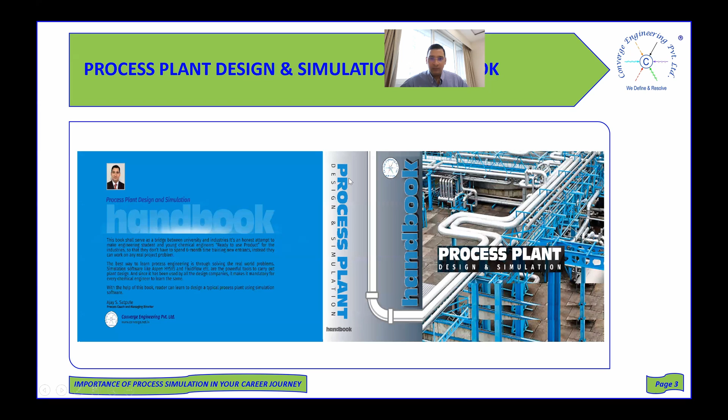So as someone mentioned, I've written two books. This is the first book, this is my lockdown product. With this book, one can learn Aspen HYSYS, not just steady state but the dynamic simulation also. And this is a very good resource for doing plant design.

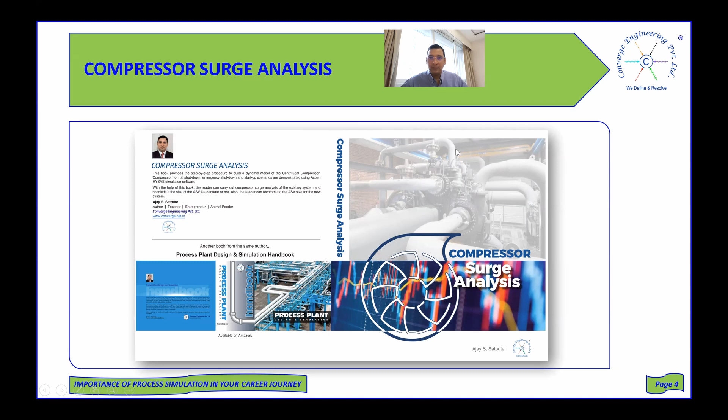This is the second book that was published last year in May. This was the anti-surge valve sizing for the centrifugal compressors surge analysis.

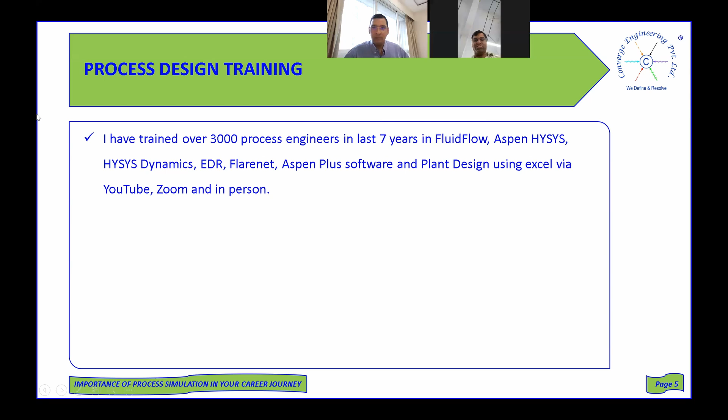All right, so I'm a trainer also. I have trained over 3,000 process engineers in the last 7 years with respect to simulation software, like Aspen HYSYS, FluidFlow, FlareNet, etc. So three of my students are PhD, and I have trained from freshers till retired chemical engineers.

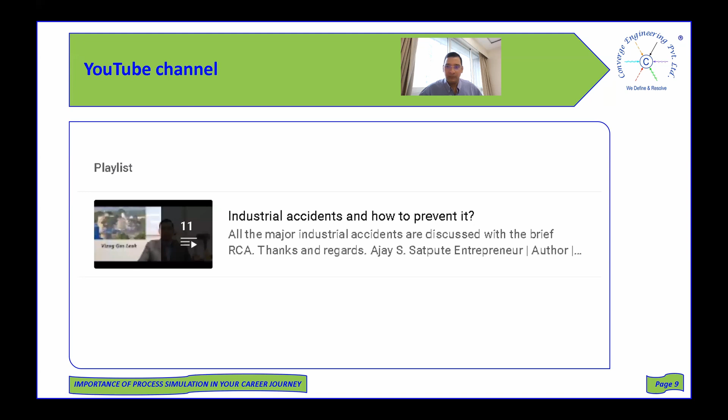And recently we had completed one series on industrial accidents and how to prevent it. So all the major accidents that we have covered, right from the Bhopal tragedy till recently what we have seen in Dombivli.

So long story short, I am a perfect example of this. I'm going to tell you what you need to do in your life as a process simulation engineer. So the career opportunities for a chemical engineer in process simulation.

So where can a chemical engineer be placed as a process engineer with simulation software expertise? You can work in an engineering consultancy like Worley, Technip, or Converge. You can be an R&D engineer working for BARC or ISRO or any other research institute. You can work as a process engineer in operating companies, in the technical services department, or you can be a production engineer in an operating company, or you could be a faculty in an engineering college.

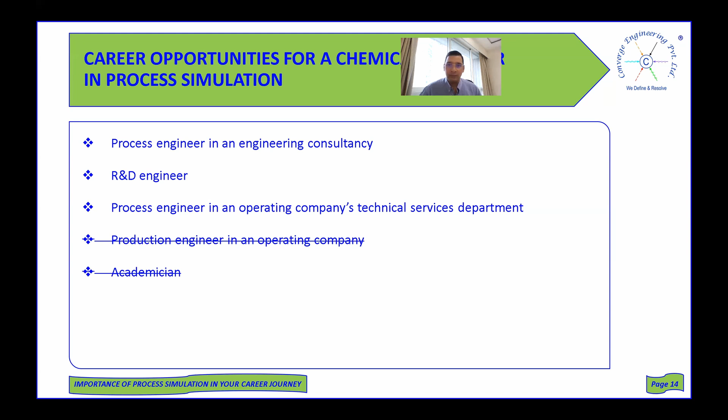But if you want to get into the simulation part, then probably production engineer and faculty are not for you. You would rather be a process engineer in a consultancy or an R&D engineer, or you will solve technical problems in your plant in the technical services department.

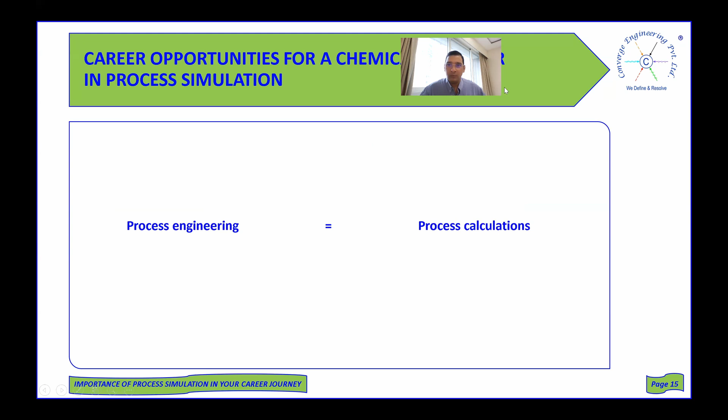The skill set required is basically process engineering, nothing but process calculations. You must be excellent with respect to calculations. And the skills required for a career in process simulation: your engineering concepts must be clear, right? So no subject should be kept as an optional subject.

You have to study 100%. You need to hone your analytical skills, because the process engineer solves problems, so you should have that problem-solving attitude. And you must have attention to detail. If any scope of work document is given to you, you have to make sure you read it thoroughly, without missing any sentence or paragraph.

You must be an excellent engineer who can work in MS Excel, and your VBA, Visual Basic skills should also be honed. If you want to become an excellent process engineer, you cannot bypass Excel, you have to become an expert in that. And of course, simulation software proficiency must be there, all the relevant software like HYSYS, EDR, FluidFlow, or PipeNet. So you must know how to use all the software.

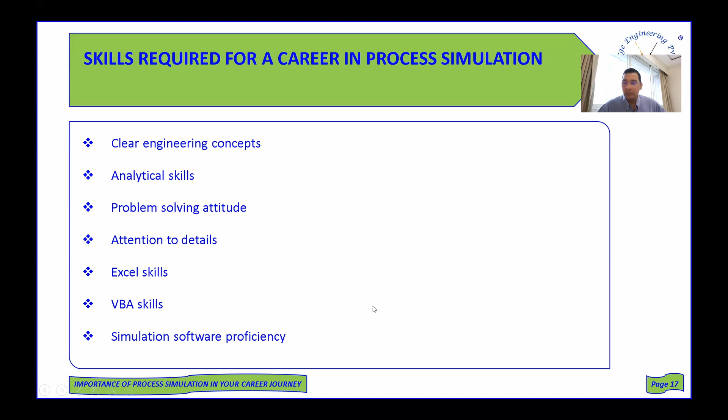So the question is, do you need to be a class topper to excel in process? The short answer is absolutely not. As a process engineer, you must be a hardworking person. Class toppers basically excel in the research field, or they could be very good teachers working as faculty in an engineering college. But if you want to be a process engineer in a consultancy or solve plant problems, you don't have to be a class topper, you don't have to be a smart person. If you are a hardworking guy, that will help a lot. Make sense?

Okay, so let us continue with the importance of process simulation. Can we do plant design without using simulation software? That's the question, because a couple of decades ago there were not many process simulation software, computers were not even fast. Yet the people who were designing plants then, we can see several plants running very well till date. So then why do you need to use simulation software today?

Valid question, right? The answer is that plants you must be seeing which were designed without the aid of simulation software were all over-designed, multiple times over-designed. So the cost of those plants would be much, much higher as compared to what you would get after using simulation software. So it is not possible to do plant design without the use of simulation software like Aspen HYSYS or EDR, etc. You have to have simulation expertise to do plant design these days.

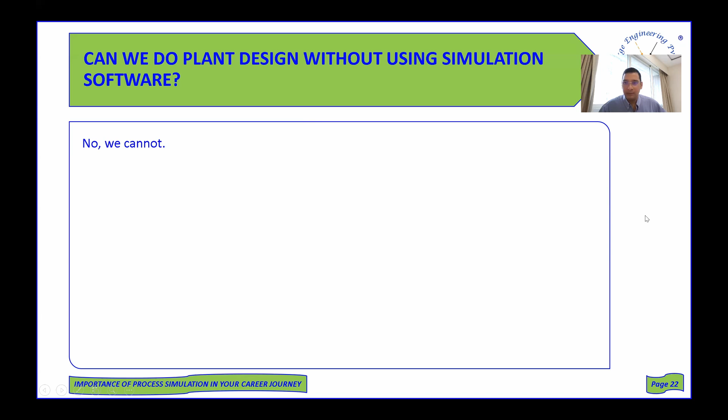We'll take one example. So the reactor needs benzene as one of the reactants. And what is the flow rate that we want? It is 30 meter cube per hour. And at what pressure do we want it? At 4 bar gauge pressure.

So where from are we going to get the benzene which will be sent to the reactor for further reaction? There is one vessel, the benzene storage vessel, operated at 1 bar gauge pressure. You can see the operating pressure is 1 bar gauge, and from 1 bar gauge pressure we want to push that benzene to 4 bar gauge pressure. So how is the pressure increase going to happen? Pressure is going to rise because of the pump.

So there is pump sizing required. Then for the pump we need to have the pump suction line, and there will be a pump discharge line. And we want 30 meter cube per hour, so flow rate has to be measured. How are we going to do that? There'll be a flow meter - we are using, say, a flow orifice. So we need to size this flow orifice.

We are going to maintain a certain level in this vessel, let's say 60% liquid level. So what is going to make sure that the level is not 0% or 100%? We have this level control valve. So this sizing will also be done by a process engineer.

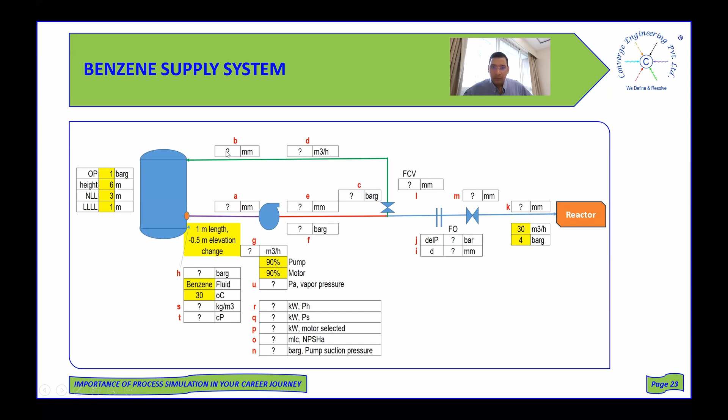So whatever numbers you see here, all the ABC, that is coming from following some process standards. And the good thing is, whatever we need - line sizing criteria, control valve sizing criteria, or even orifice sizing criteria - are all available in those process standards. And fortunately, there are only less than 10 process standards that a process engineer has to use.

Once you are thorough with this - let's say API 14E gives line sizing criteria - so what is the pump suction line sizing criteria, or pump discharge line sizing criteria? If it is a gas line, what should be the maximum velocity? That is again a different line sizing criteria. If it is two-phase, then comes the erosion velocity criteria. So all these things are available.

So the thing is, you need to read it and understand it. And that is the reason, as I said earlier, to become an excellent process engineer you don't have to be smart, you have to be hardworking, because you are doing the same thing again and again. So eventually, after a couple of projects, you become an expert in that. For the third project, you don't need anybody's help.

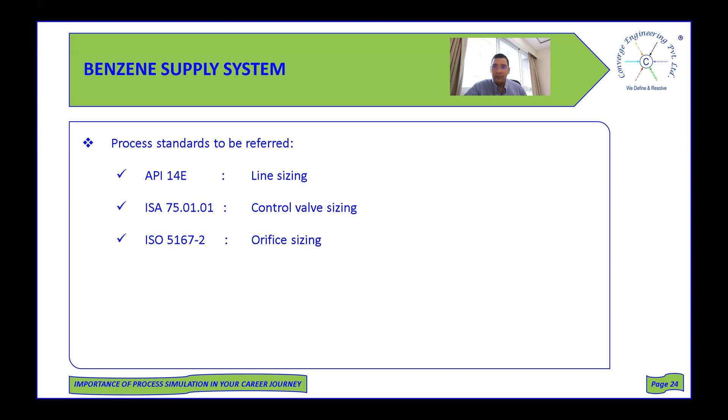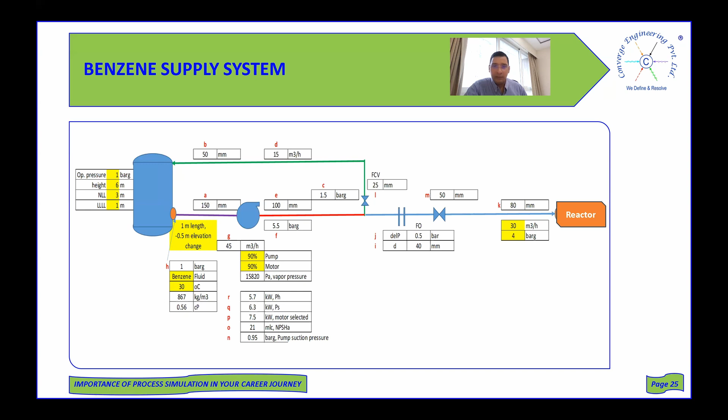This makes sense, right? So once we have used all these standards and done our calculations as per the guidelines given in those standards, using the Excel file also we can do this.

If you use simulation software like Aspen HYSYS, this is a screenshot of the Aspen HYSYS model. We can do the same thing but in less time and more accurately, because at every point we can get the physical properties of every material stream. So we would know exactly what's happening in that particular plant.

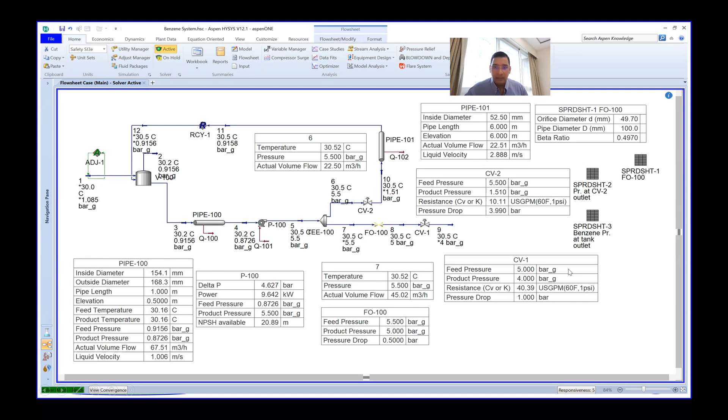In this case, simulation software like Aspen HYSYS is not required, as the design is quite simple. So let us make things more complicated.

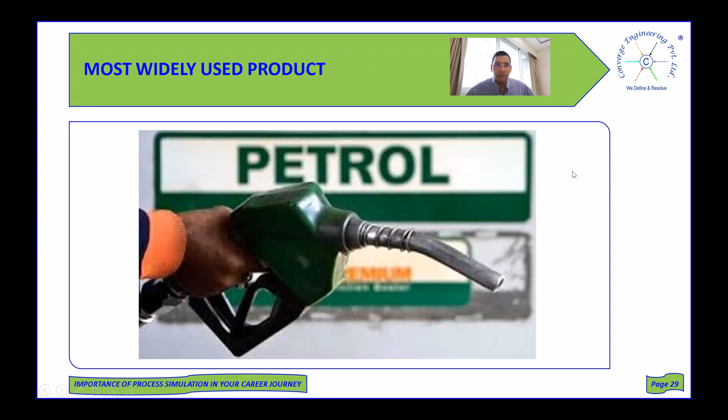You know this product is one of the most widely used products, petrol. Where do we get this from? Who manufactures it? Refineries. And what is the raw material for this refinery? It's crude oil, correct?

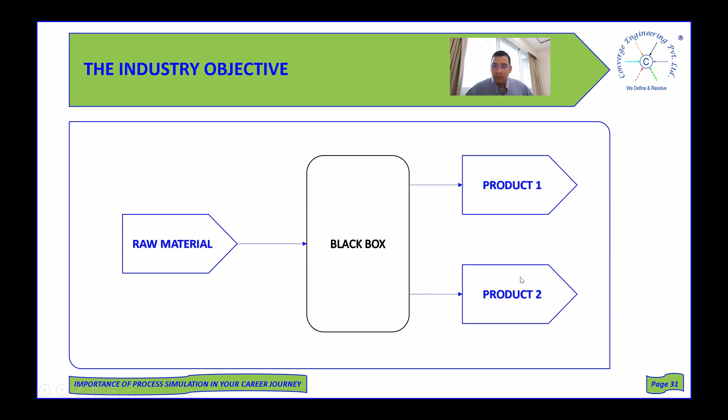So any industry's objective would be to take the raw material and convert that into useful products. In this particular case, crude oil is our raw material, and from crude oil there are different products that can be extracted - bitumen, diesel, petrol, kerosene, LPG.

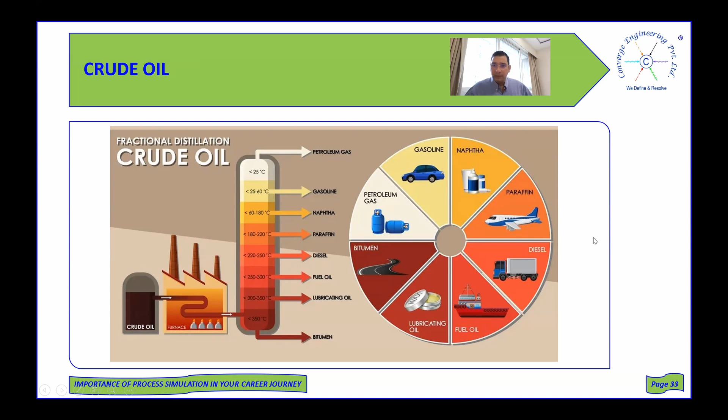So you must be wondering why exactly these refineries would do this hard work - take the crude oil and produce petrol and other products. Can anyone tell what the purpose is? Do they do it for the benefit of society, so people can run their cars and other vehicles? Absolutely not, that is not the reason.

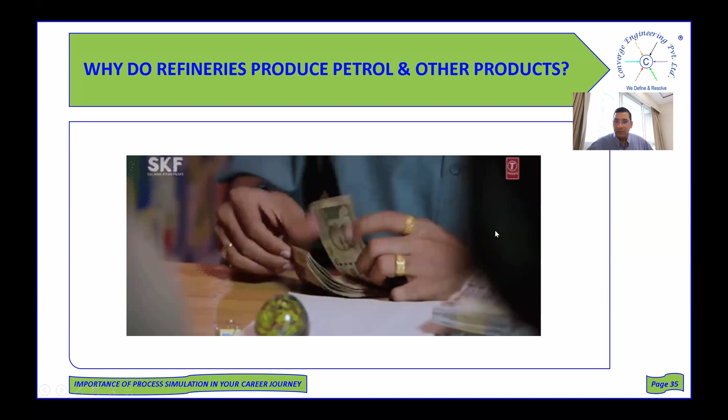The only reason why refineries or any other company would produce or manufacture something is all for the money. So a process engineer would have technical aspects intact as well as commercial aspects. He or she would know that if I design the plant in this way, whether the plant is going to make profit or going to be in loss. Make sense?

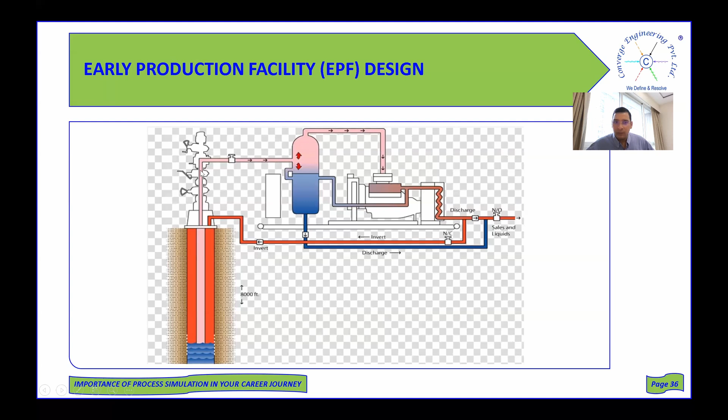Let us talk about this early production facility, or EPF, design. So how is the crude oil taken out from the Earth's core or Earth's crust? You're going to drill a hole, and then under the Earth's crust you will find deposits of crude oil or gas or even produced water, and that will be in pressurized condition.

That will come out to the Earth's surface through this pipe, and this will be sent to heat exchangers. It will be sent to the heater to increase the temperature of the two-phase feed - here we are considering oil and gas. So it goes to the separator. What is the function of the separator? To remove vapor, or remove gas from the oil. Then gas will be sent to the compressor for further processing, and that can be used as CNG or LPG.

The oil will be sent through the pump, it will go to the flow orifice, then you will go to the LCV, then finally go to the preheater, and it will be sent finally to the storage tank for storage, and that crude oil will be sent to the refineries for further processing.

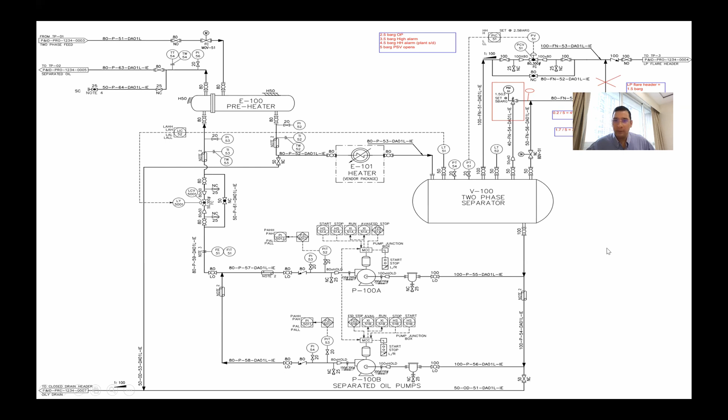So in this, what software might one use to do the design? Aspen HYSYS, and then Aspen EDR. EDR for heat exchanger sizing, and Aspen HYSYS for the process simulation.

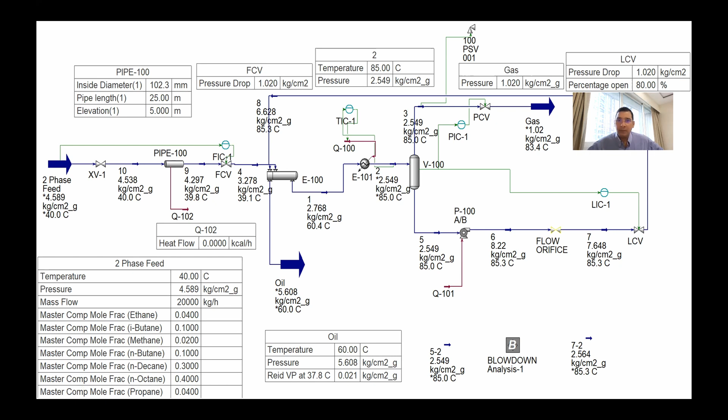This is the model that one can get for the same system using Aspen HYSYS. So we have this on-off valve, the pipe segment for two-phase line sizing, a flow control valve, a heat exchanger - shell and tube heat exchanger - then a heater package, then it goes to the separator, and at the bottom you can see the pump, followed by flow orifice, LCV, and in the vapor line you might see here a pressure control valve. So whatever we have on the P&ID, on the drawing, everything can be simulated using Aspen HYSYS.

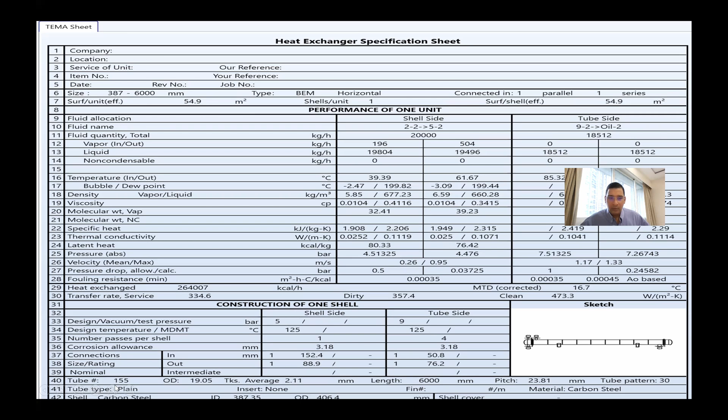And this is the sheet that will come from Aspen EDR. It would tell you how big the heat exchanger, or the preheater - the shell and tube heat exchanger - you need to design. In this case it is like 55 square meters heat transfer area, the tube length is say 6,000 mm, and you can see the number of tubes is 155. This is called the TEMA sheet.

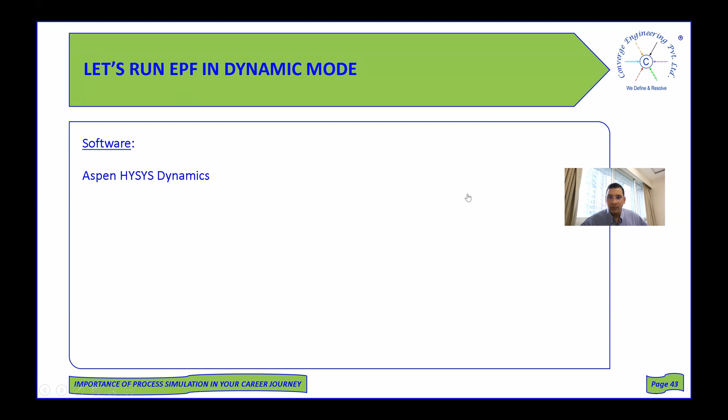Right, so I'll just click here to run it.

So you can imagine the power of the simulation software. You have not purchased a single nut bolt for that plant, but still you are able to visualize what is going to happen when the plant is in running condition. Whether the equipment that you have designed is adequate or not, and whether there's going to be a bottleneck.

If I increase the set point from 20,000 to 22,000, all these scenarios you can study before a single nut bolt has been purchased. So that's the reason it makes more sense for operating companies to invest in modeling using simulation software, so that they can save a lot of money.

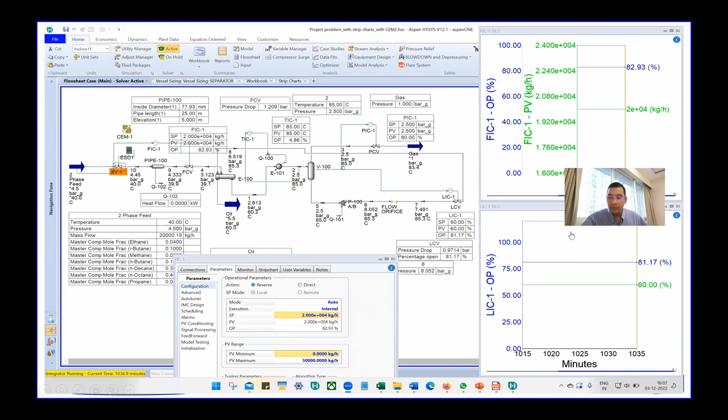In future, there is something called pinch analysis. The objective of pinch analysis is to minimize or eliminate the utility. Utility means steam, thermic fluid, cooling water, chilled brine, etc.

Now, one of the major reasons operating companies make losses is they spend a lot on utility. So if you are able to reduce steam consumption, cooling water consumption, or chilled water consumption, the total operating cost would be reduced, and since profit equals sales minus cost, your profit would be increased.

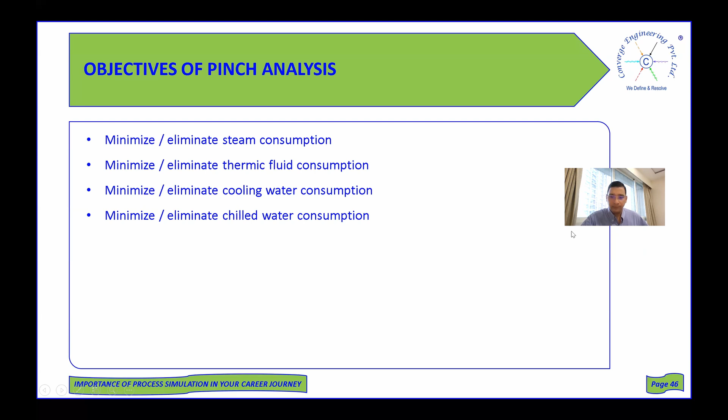So there is this example we have, this two-phase feed. It is going through the flow control valve, then directly to the heater package and then to the separator. Finally, we wanted oil at 60 degrees C temperature, and we have here a cooler. We'll be using cooling water here.

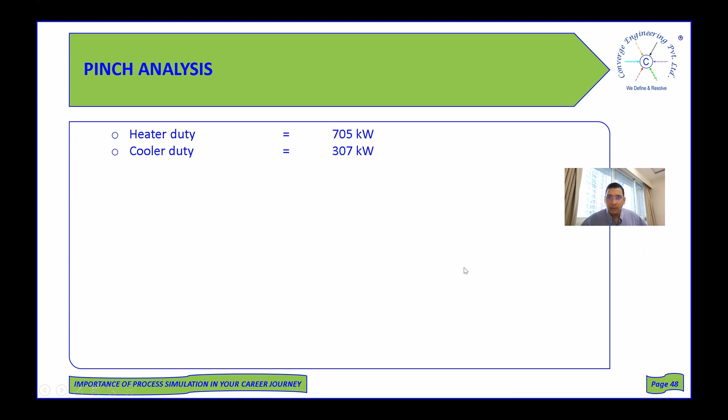Now, this is the existing system. The heater duty is 705 kilowatt and the cooler duty is 307. It means for heating purpose we need 1.2 TPH of LP steam and around 50 meter cube per hour of cooling water. This cooling water would come along with a cooling tower, cooling water supply pumps, piping, instrumentation, control valves. And this 1.2 TPH LP steam would come with a boiler of the said capacity, the piping, insulation, all these things would come along with this.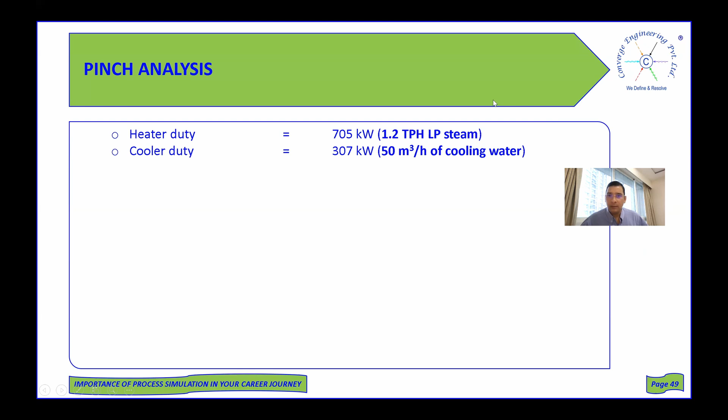So the question we need to ask as a process engineer is, is this the best design possible? So if I remove this cooler, and the hot stream at 85 degrees C, I'll send it to a new shell and tube heat exchanger, let's say on the tube side, and it will exchange heat with the incoming 40 degrees C feed.

So what will happen? 85 degrees C will give heat to the 40 degrees C feed. 85 will become 60 degrees C, and it will go as it is supposed to go to the storage tank finally.

Because of this, there is 40% savings in the heater duty, and 100% savings in the cooler duty. So you can imagine how much money we have saved here, especially for the cooling water side.

Now there is no need to purchase any cooling tower, no need to purchase any cooling water supply pumps, no piping required, no instrumentation, no control valves. You can imagine at least 50 to 60 lakh rupees we have saved for this particular design.

And what is the reduction in the heater duty? You can see 40%. That means the capacity of the boiler that we were planning to purchase will go down, and the operating cost to run that boiler is going to go down by 40%. So we're talking about huge savings in money.

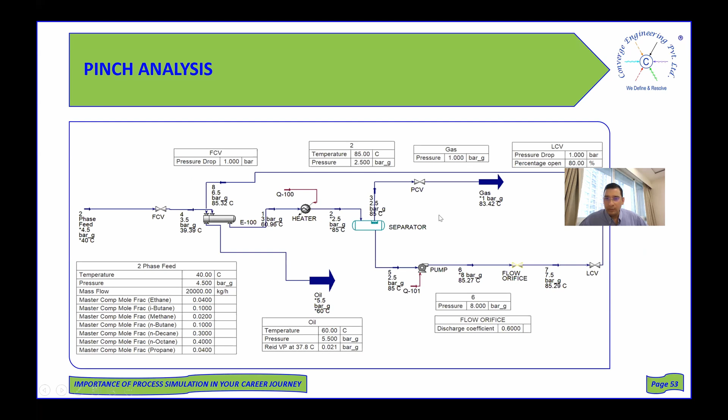Using Excel calculations, it is not really possible to do this effectively. That's why we have to take help from simulation software.

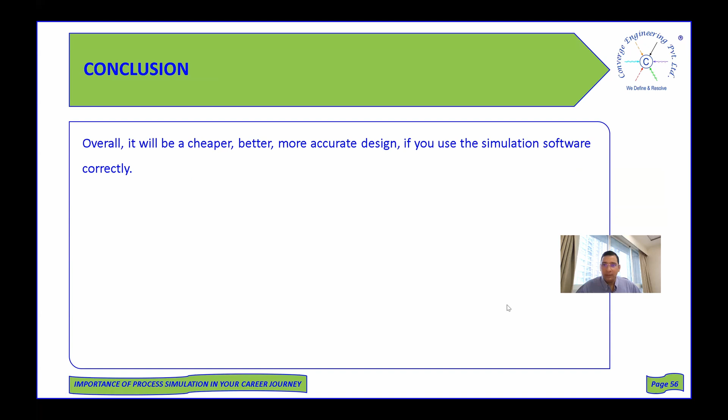So to conclude, overall it will be a cheaper, better, more accurate design if you use the simulation software correctly. Now the emphasis should be on the word correctly, because anybody can use the software, but how to use it in the correct way or the right way, that is another story altogether.

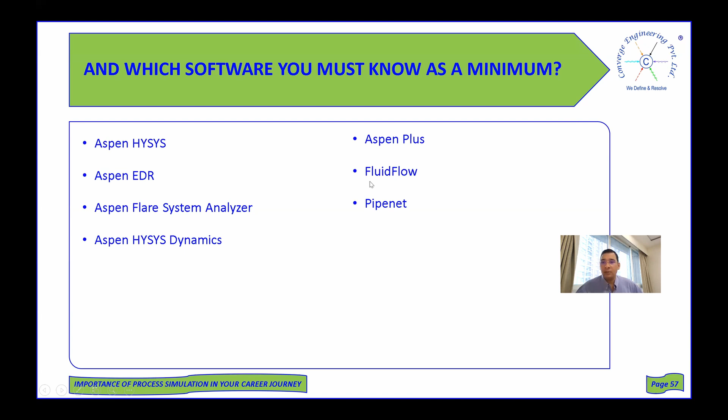So which software must you know as a minimum? Aspen HYSYS is there, Aspen EDR is there, Aspen Flare System Analyzer or FlareNet is there, Aspen HYSYS Dynamics is there, there is Aspen Plus, and for hydraulic simulation and pressure calculation, you can use FluidFlow software or Pipenet software.

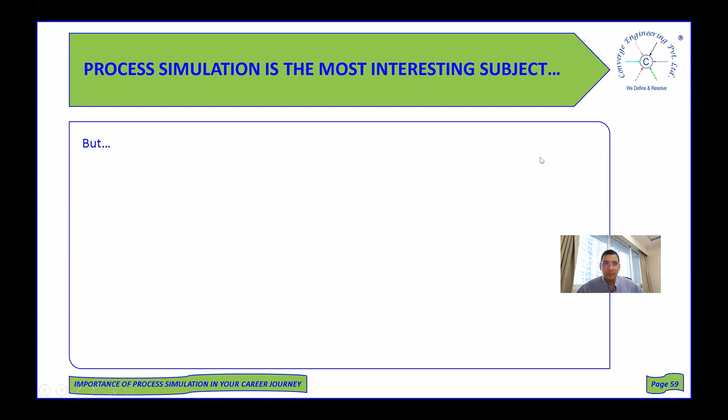So to conclude, I would say that process simulation is the most interesting subject, right? But the catch is, unfortunately, no one can tell you how interesting this subject is. You have to see it for yourself.

So if you have planned to become a process engineer, then how to get started and excel? You need to learn Aspen HYSYS, EDR, FluidFlow software - that is number one. You need to get professional training, because whatever you learned in your 4-year bachelor's is not really useful per se if you want to be a ready-to-use product in industry, especially in consultancy.

So the formal training has to be there, because the industry spends a lot of effort, energy and money to make the freshers like you turn into a ready-to-use product. So whatever skills are required to become a good process engineer, you need to learn it from some professionals.

You need to update your CV, right? Because if you have learned the software, you have to make sure you write that in your CV, so that the companies would notice that and probably ask you questions on those topics. And if you really learn those softwares well, then you'll be able to answer their questions and get the job.

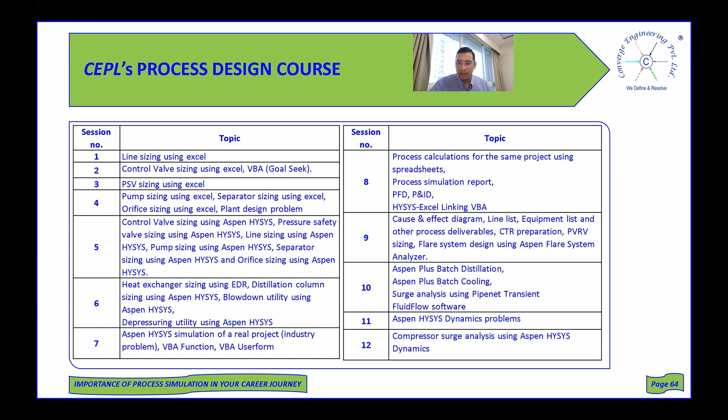Aspen Plus also you will learn, and you will learn how to do surge analysis using PipeNet transient software, how to use this FluidFlow software. You'll become more conversant with dynamic simulation problems, because sessions 11 and 12 talk only about dynamic simulation problems. You will also learn how to prepare the documents: process simulation report, how to prepare the PFD from scratch, how to prepare the P&ID, what needs to be considered, and what things are not important. So all this information would be given, and it will be hands-on training. Basically, you learn what industry expects, and you'll figure out what a process engineer is supposed to do in industry. This is purely job-oriented training.

And we do provide placement assistance. I don't believe any of my students who want a job is not having a job. Many of my students I hire because I'm more comfortable with them, since I know they have already completed the process design training, and they know how to do the calculation, how to do the simulation, how to prepare the documents. Anyone who wants a job, the one question I ask is whether he has completed the homework assignment or not. If the answer is yes, there is no interview. If I need, I hire, just like that.

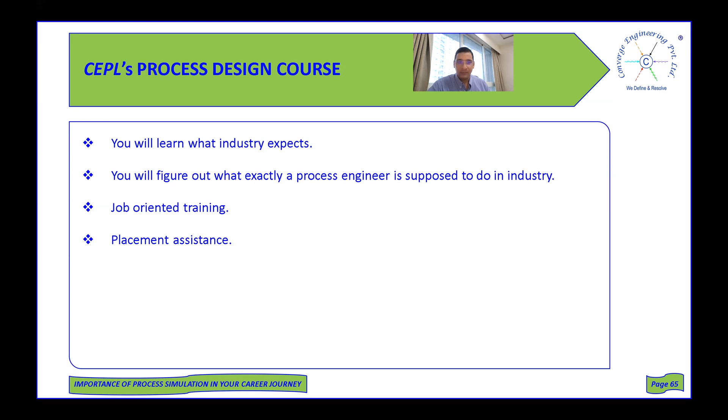Don't believe me, believe Google. There are 292 reviews. Take some time, try to search Converge Engineering Google reviews and read them on your own. Okay, so that's it from my side.